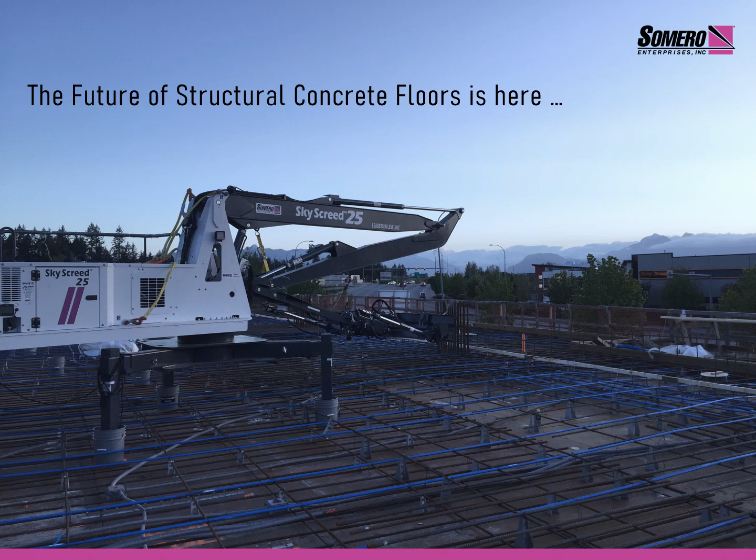Thank you all for taking the time to join the Somero team today for our webinar series on the Somero Sky Screed laser screed machine. Over the next 20 to 30 minutes, we're excited to begin a conversation with you on how this machine can change your business. Before we begin, we would like to give a quick overview of Somero, the company, for those of you who are not familiar with our business and our history.

Somero introduced the first ever laser screed in 1986, effectively inventing the industry. The early adopters of this equipment and technology quickly became leaders in their markets, in large part due to the quality and labor savings that the laser screed delivered. Big box stores like Walmart, Lowe's, and Home Depot quickly realized the superior quality the new laser screeds were delivering and soon wrote them into their specifications.

Fast forward to 2019, and Somero is once again changing the game with the first ever laser screed designed for the structural high-rise market. In our presentation today, we're going to hit on some high-level details of the Sky Screed and how it will change and grow your business. We will by no means answer all of your questions during this presentation, but we are absolutely available after this to discuss your specific needs.

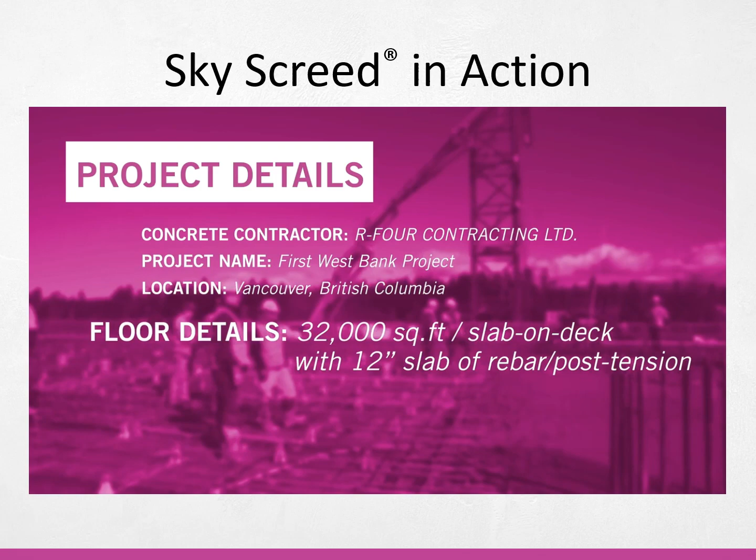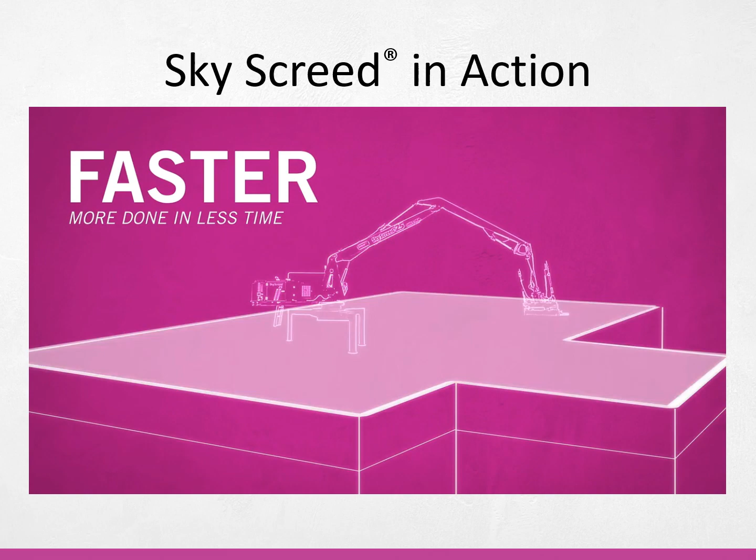We would like to start with a video case study of one of our first customers for the Sky Screed 25, R4 Contracting, in Vancouver, British Columbia. This job was a demo, and R4 also had a crew of 12 hand-screeding a section of the floor, while Sky Screed and its team of 3 screeded another section of the floor, setting up a classic man versus machine challenge, the results of which we will touch upon later.

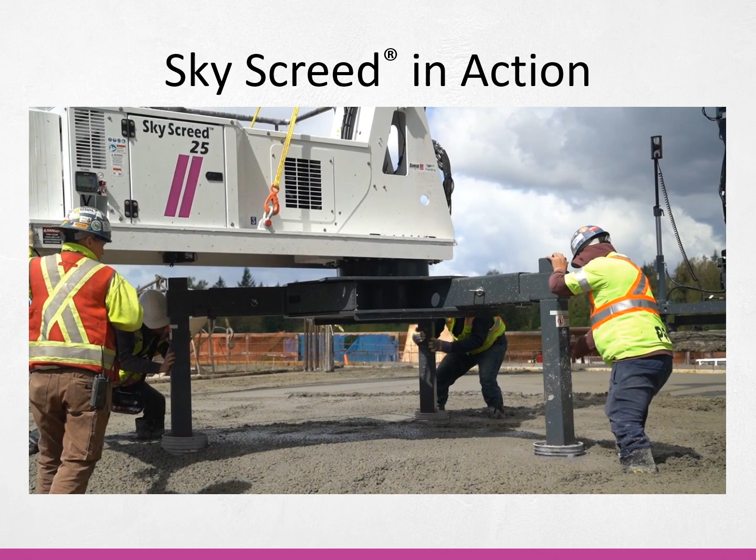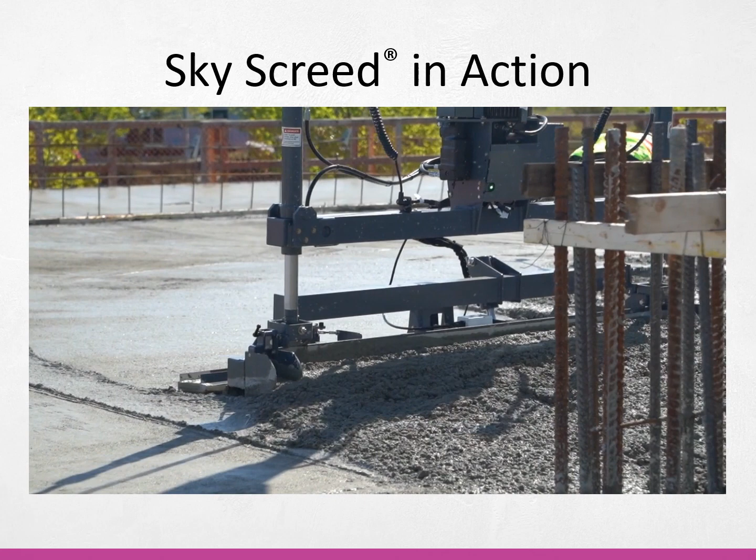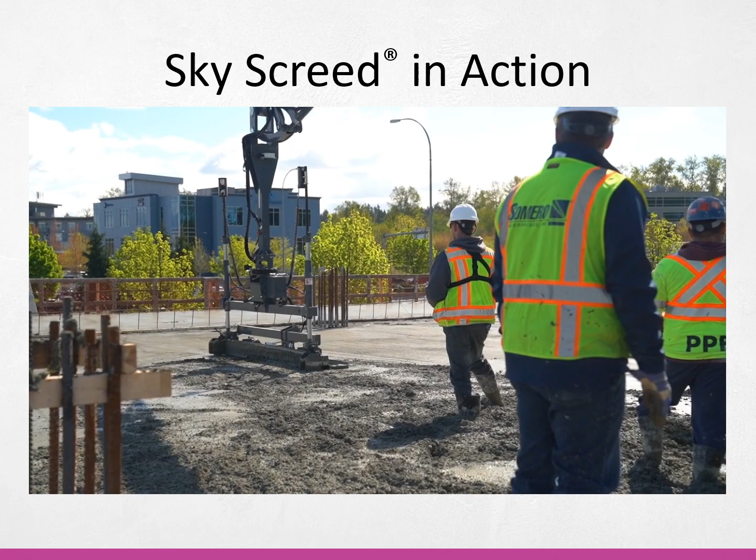Here is the hand-screeding team. As it turned out, we finished our allotted sections ahead of schedule and ended up screeding 2 additional sections that were supposed to be for the hand-screeding team. That is the 360 screeding capability feature that we just saw there. We'll touch on that more later. So that is a little preview of the machine in action and an example of the kind of quality floor that this machine is capable of delivering for you and your customers.

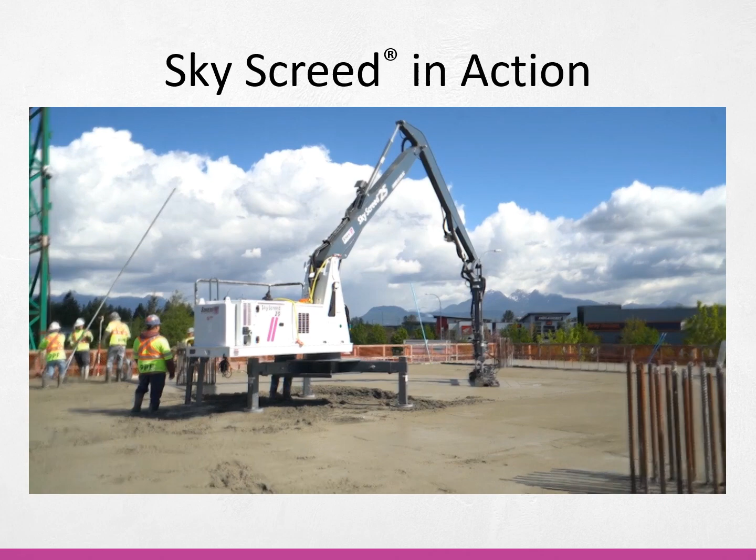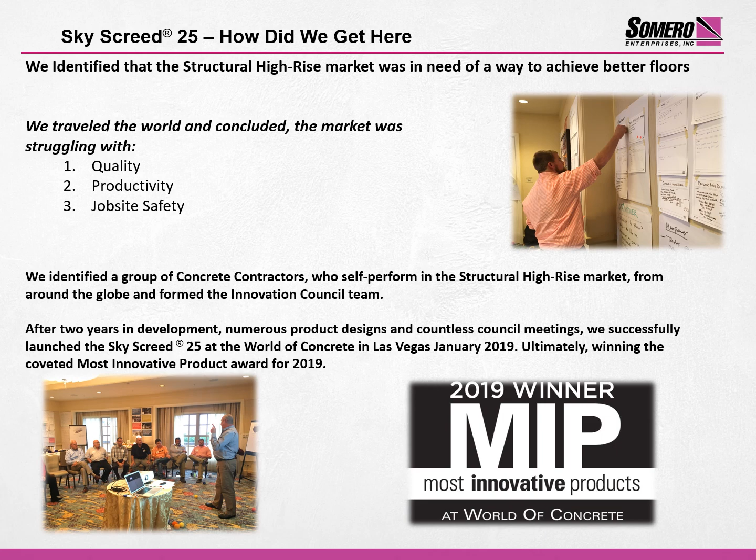Before diving into the machine specifics, we do want to take a moment and give you a little background on how we got here. How was this innovative machine created? Like a lot of our machines, we collaborate with our customers to understand their needs and how the machines need to perform. We formed a specific innovation council with our customers that work on structural high-rise projects, and the Sky Screed was born out of their feedback and direction on machine capabilities. Ultimately, the machine was launched in 2019, winning the Most Innovative Product Award at the World of Concrete. With an understanding of Somero and the history of the Sky Screed, it is now time to get into what matters most. How does the Sky Screed perform?

Some of the key benefits that were realized early on were proven FL numbers in the high 30s to low 40s, based on feedback from our customers. Reduced manpower, from as many as 14 to as little as 5, dramatically reducing the number of men on the deck at any one time. Fewer workers mean fewer opportunities for injuries.

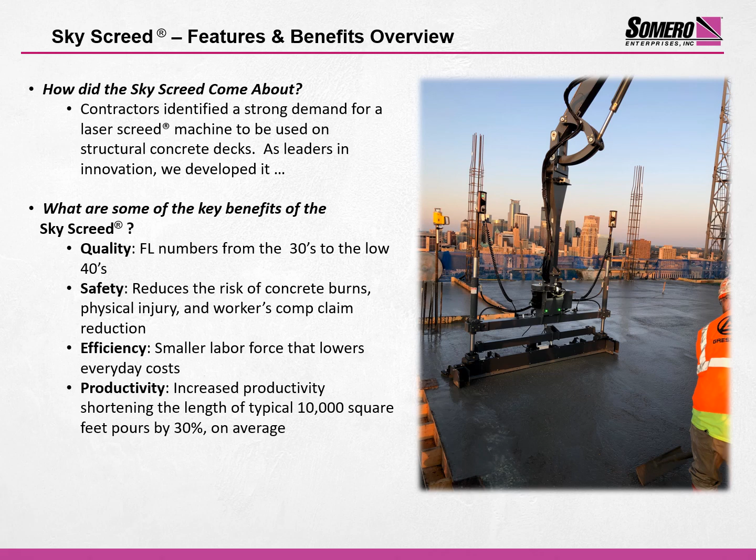Reducing pour times is a norm with the Sky Screed. We've had contractors pour as much as 5,000 square feet per hour on a consistent basis. Increased productivity shortens the length of a typical 10,000 square foot floor on average by 30%, taking a 4.5-hour pour to just 3 hours. The machine never gets tired. It works at the same rate morning, noon, and night, and never calls in sick. So what types of jobs is the Sky Screed best suited for?

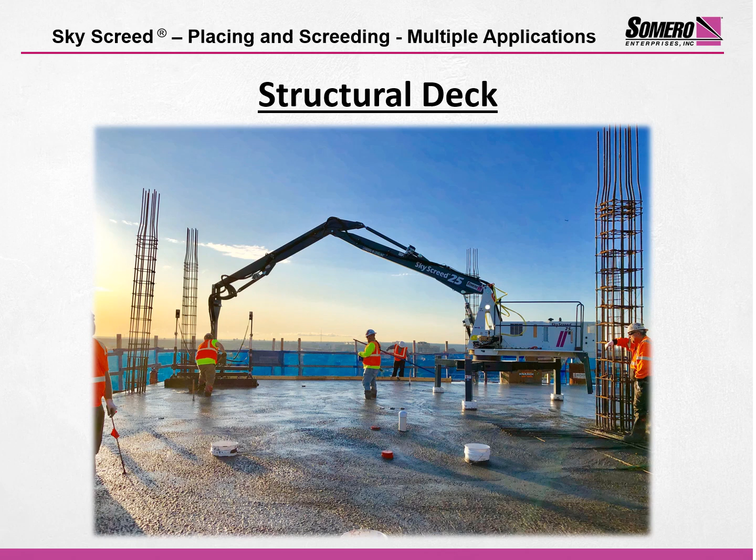Of course, the Sky Screed is extremely effective on high-rise post-tension and structural concrete decks. This is what the machine was invented for. This picture is of the 26th floor of the Expo project in Edina, Minnesota by Gresser Construction. All the contractors that have purchased a Sky Screed from us have been structural concrete contractors, and their primary intended use for the machine is to pour structural PT high-rise decks on commercial and residential projects. As machine owners, our customers eventually realized other applications for using the machine.

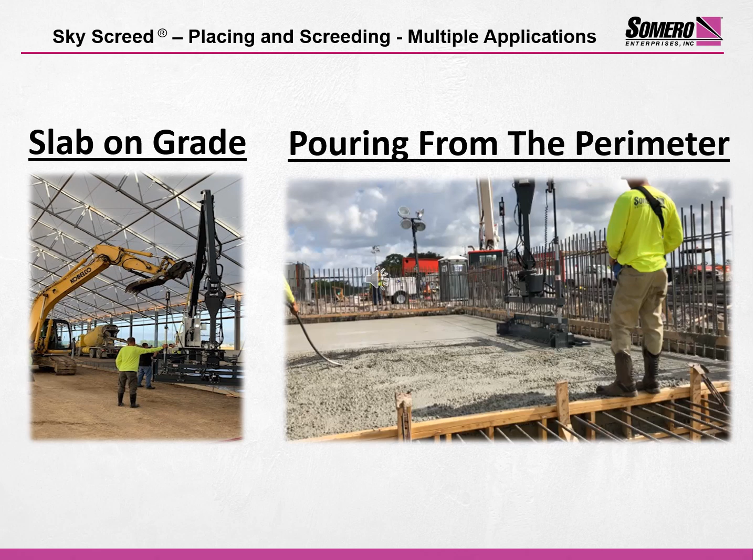We appreciate that with new machines, there needs to be new tools to help the customer use the machine easily from their first project to their 100th. So we created a proprietary app that precisely lays out the most efficient placement locations for the machine for the specific floor layout. It only takes about 15 minutes to lay out an average deck pour once drawings are made available.

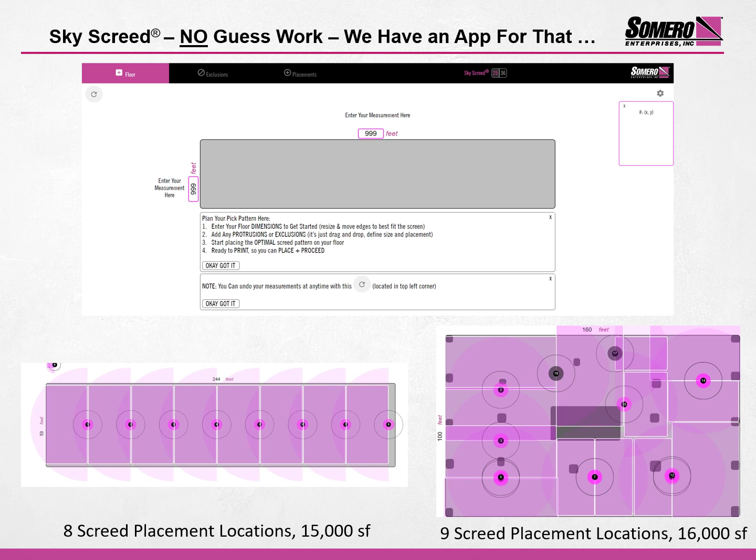On the left is a parking garage project one of our customers is building. This job has only 8 placements to pour, almost 15,000 total square feet. On the right, we have an example of a typical high-rise center core project with intermittent columns. This job only requires 9 picks for a total of 16,000 square feet per floor.

How the Sky Screed is changing the game. Quick Pass function. The machine is equipped with our patented Quick Pass function that allows the operator to handle the overzealous hoseman. If the concrete is too high, you can simply do a quick pass to move the concrete out of the way, and then come back with a finish pass to screed and vibrate the concrete to finish elevation. The Quick Pass function screeds the concrete 1/2 to 1 inch above the finish elevation, allowing you to move concrete quickly and efficiently out of your way. This eliminates the need for additional men manually raking excess concrete around throughout the pour.

360-degree rotation. The 360-degree rotation is key to easily navigating around columns and scheduled openings. Both the machine and the screed head rotate 360 degrees, allowing the machine to work around all types of obstructions. The Sky Screed is the only laser screed in the world with these combined features. Wireless remote. With the wireless remote, you can operate the machine from the landing area on the machine or from down on the deck. Pump operators tend to prefer down on the deck, just like they run their pumps.

8-foot screed head. The 8-foot head on the Sky Screed is equipped with an attached vibrator and is the same head that comes on our popular S485 laser screed. This machine has a proven success record pouring millions of square feet of floor each year. Augerless head. The Sky Screed has an augerless screed head. This allows you the ability to push and pull concrete in any direction. A machine with an auger can only move concrete from left to right, limiting its capability.

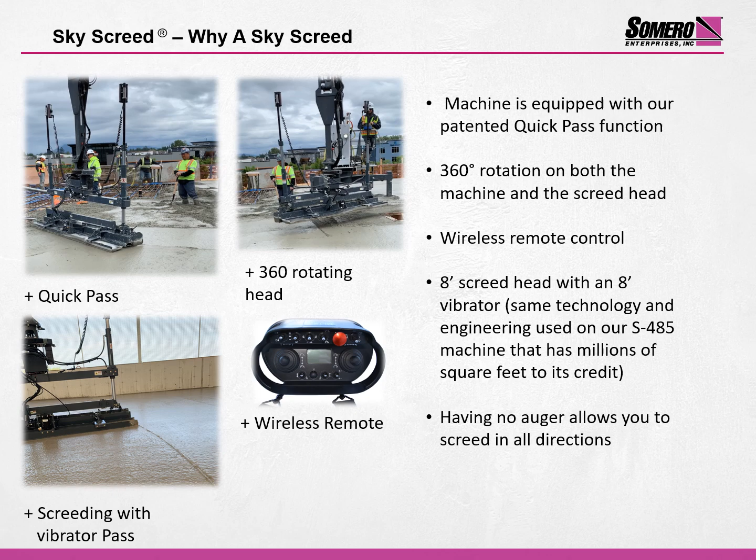As with anything, the machine is only as good as its results. Let's look at the Sky Screed by the numbers. This is the Citibank project one of our customers, R4, had in Vancouver, British Columbia. R4 was very interested in purchasing a machine, but like most contractors, they wanted to see it in action to see that it delivered all the things we said it would do. In order to prove to this contractor that the Sky Screed could perform as advertised, we agreed to participate in a side-by-side demo against his crew. The result was that the Sky Screed outperformed the man crew by screeding 14,000 of the 22,000 square foot pour and giving up 2 of its 5 men to help the man crew finish their portion of the job.

As a result, R4 was able to achieve an FF58 spec required and all but eliminate the remedial work afterwards. This contractor had previously been required to flood the floor with self-leveling product in order to achieve the specified floor tolerance. Eliminating this step saved the GC as much as 2 days in their schedule per floor.

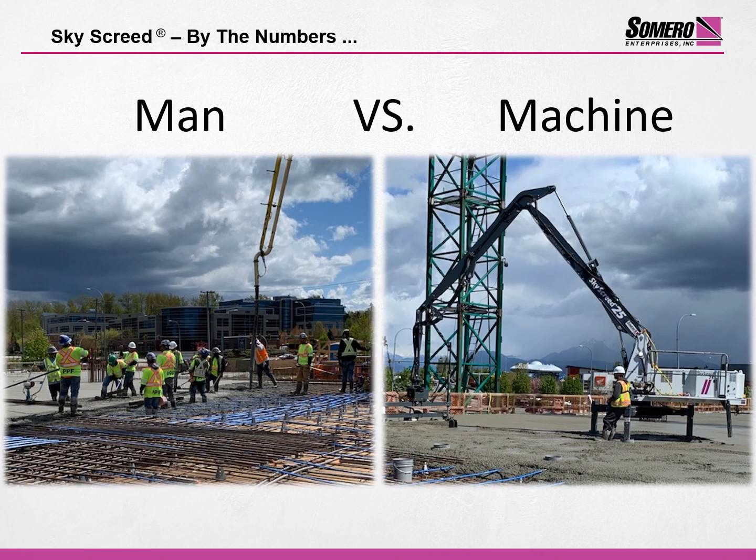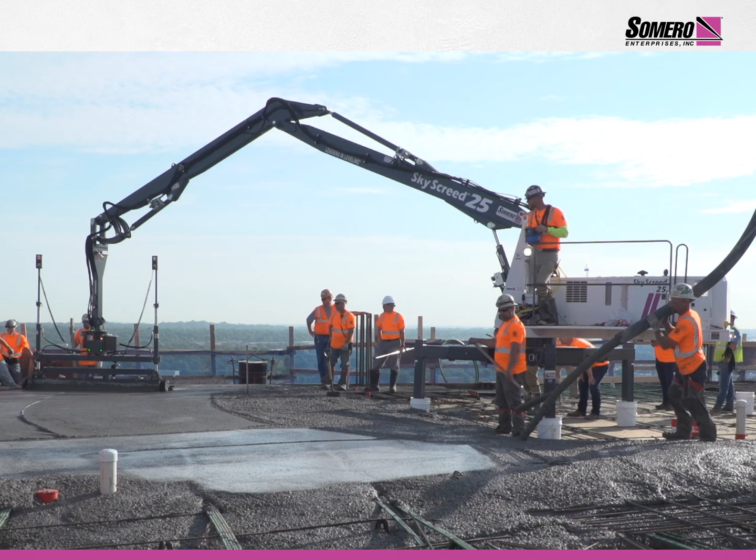This is the Expo project in Edina, Minnesota by Gresser Construction. In one of our original conversations with them, Nate, their concrete foreman, said he was familiar with the machine, but he didn't think it would work for them. After going through one of our presentations in person, Nate was convinced that he needed to get one of our machines on his job. By the time they finished the first pours, he was convinced that they needed to purchase a Sky Screed. In fact, on just their third pour, Gresser placed 17,000 square feet with 5 men in just 5 hours. Here is another image from this same Gresser project. This highlights concrete that has been screeded in the foreground of the image, and concrete that has been redistributed via the Quick Pass feature in the background.

Here we have a very straightforward cost calculator comparison to show the dollars and cents savings of the Sky Screed. This is a simple cost calculator based on a 10,000 square foot floor. At a rate of $60 an hour, fully burdened, and $90 per hour overtime using 14 men with the traditional hand screed method, you can compare the Sky Screed at 5 men, $60 an hour, $90, 2 hours overtime. The cost will show you a savings per pour of approximately $6,000. This is a very conservative comparison.

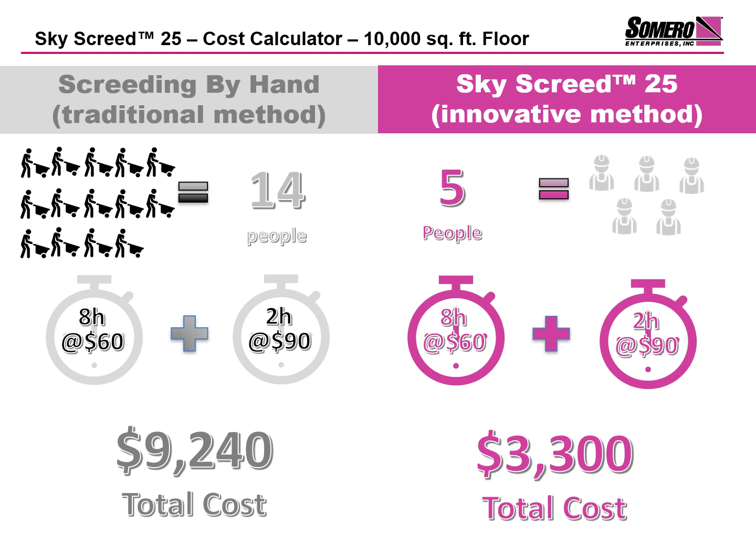Please remember that we had a contractor pour 17,000 square feet in just 5 hours with 5 men. In addition, we've been told by contractors around the country that it can take as much as 30 hours per floor for remediation to achieve the proper FL numbers required. At $60 per hour, this can be a savings of as much as $1,800 per floor, not to mention the additional time saved in your schedule.

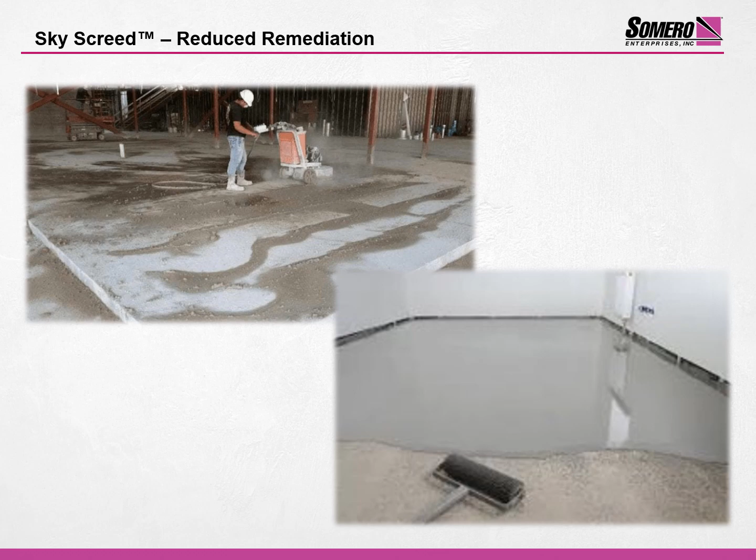Additionally, our research has told us that there is typically 30-plus man-hours of floor grinding and patching on each floor to achieve the required flatness called for in the spec. With the Sky Screed, you can eliminate this work by achieving the required numbers the first time, giving you the previously discussed savings. As we all know, FF numbers are best achieved through achieving great FL numbers first.

Our industry is driven by making the machines bigger and more productive. The Sky Screed is no different. We listen to our customers and developed the latest addition to the Sky Screed line of machines, the Sky Screed 36. We appreciate that some projects call for more reach and weight is not a concern, while others have lift capacity issues. So with the Sky Screed 25 and 36, we have a solution for every project.

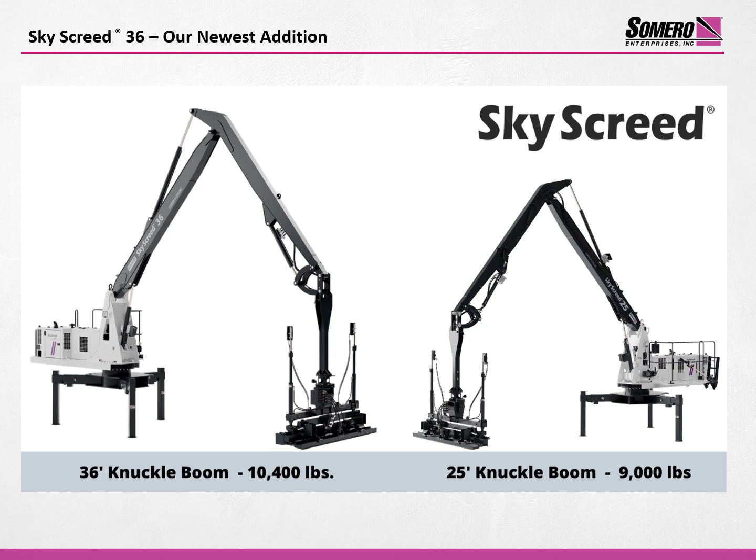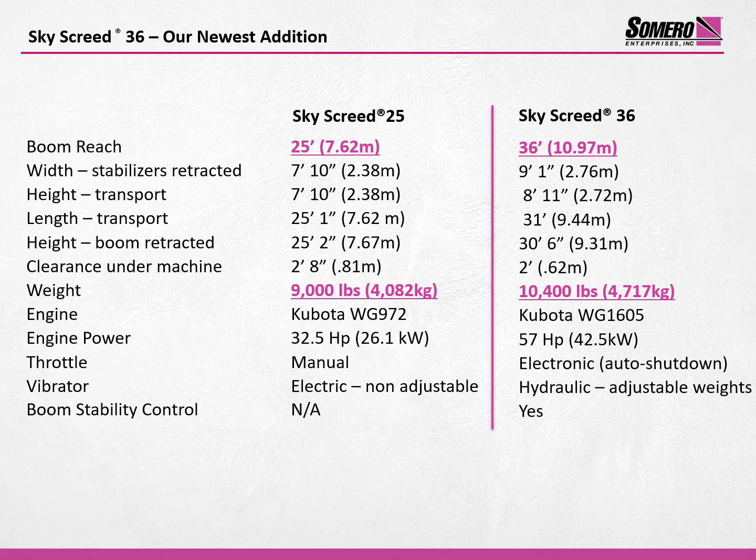The Sky Screed 36 not only has 11 more feet of reach, but it allows you to screed an additional 1,000 square feet per placement, with almost half the pick placements required compared to Sky Screed 25. The two biggest factors differentiating the machines are, it has a larger, more powerful engine, a longer boom length with the same number of sections as the Sky Screed 25, and weighing only 1,400 additional pounds. We've heard from general contractors that if a tower crane will pick 9,000 pounds, it will typically be able to handle an additional 1,400 in most cases.

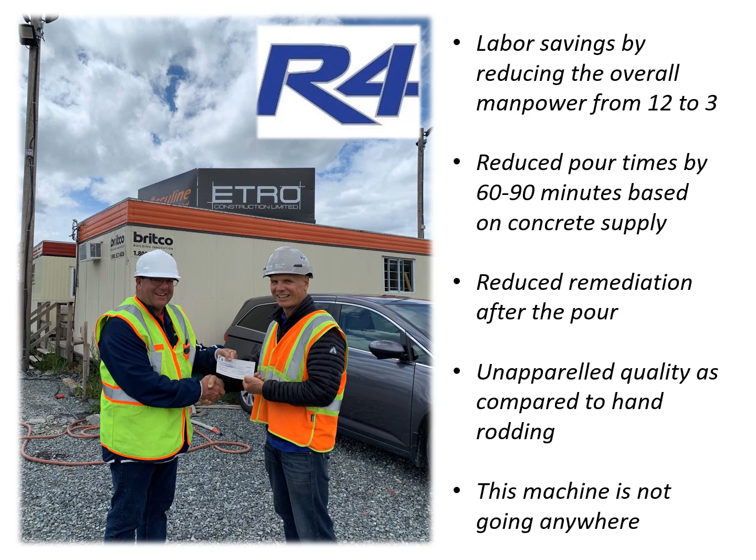We have been working with our customers for 34 years, making sure that they get the right laser screed for their business. And from this experience, we know that this is just the beginning of our conversation with you, and that you will have a lot of questions. And we welcome that. However, we do have a few questions that we have heard in the last year, so we will go ahead and address those now. Question: are there any limitations to the type of structural deck the Sky Screed can be on? No. Whether it is a PT or just rebar, the Sky Screed will work.

What does the prep work look like for getting the machine onto the deck? There is some day-before prep work with regard to shoring and layout, but for the day of schedule, you can take the machine right off of the delivery truck and put it on the deck. How easy is it to move the Sky Screed once it is on the deck? With the 4-point lifting harness that comes with the machine, it's just a matter of putting the D-ring on the crane hook and lifting it to clear the 5-gallon buckets. Each move takes approximately 1 minute 30 seconds.

How much support do you provide with this machine from sales consulting to training? We cannot afford to let anyone use this machine without being thoroughly trained. We will be there until your crew is comfortable enough to sign off on being fully trained. We also have 24/7 customer support. What is the estimated break-even point on a Sky Screed 25 or 36 as far as cost savings? Based upon your hourly rate, it can be as low as 500,000 square feet to pay for the machine.

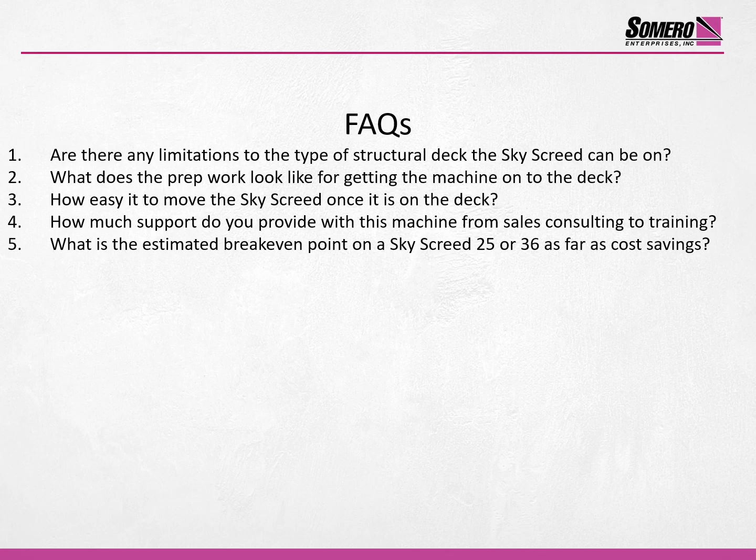While not a complete list of the questions that will lead you to the solution of adding a Sky Screed to your fleet of machines, the following do help pull into focus the reasons that our customers have purchased a Sky Screed in the last year. Do you have a need for higher quality floors? Want to help minimize the chance for injuries on your jobs, beating industry benchmarks? Get tired of fighting over repairs and want to turn over a better floor to your owner? Struggle to get your floors done right the first time? Want to have the flattest floors in the industry? Want to be the undeniable market leader in innovation? If you can answer yes to even a few of these questions, then the Sky Screed is a perfect solution for you.